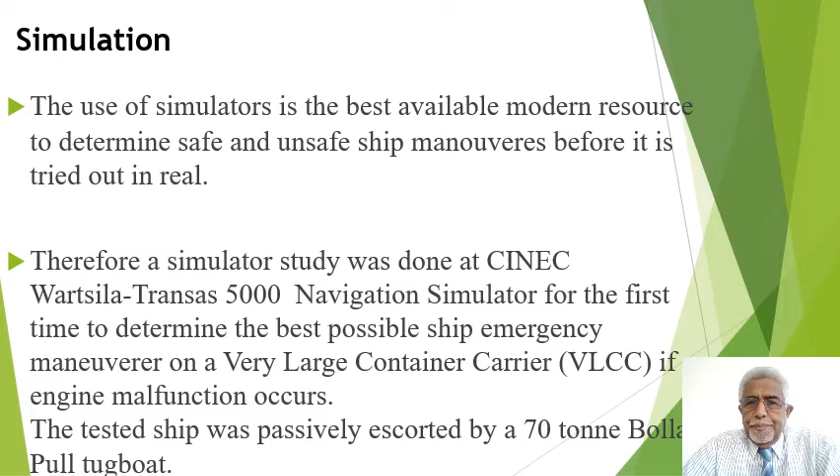The research aim. The aim of the study is to identify how such incidents, mainly due to equipment malfunction, can be prevented with least damage to other property inside the harbor, including other ships and jetties. The simulator research study will identify the best preventive action to be taken in future by ship handlers, including harbor pilots and ship captains, using all available resources, or if further resources are needed, to be recommended to stop the ships safely in the harbor.

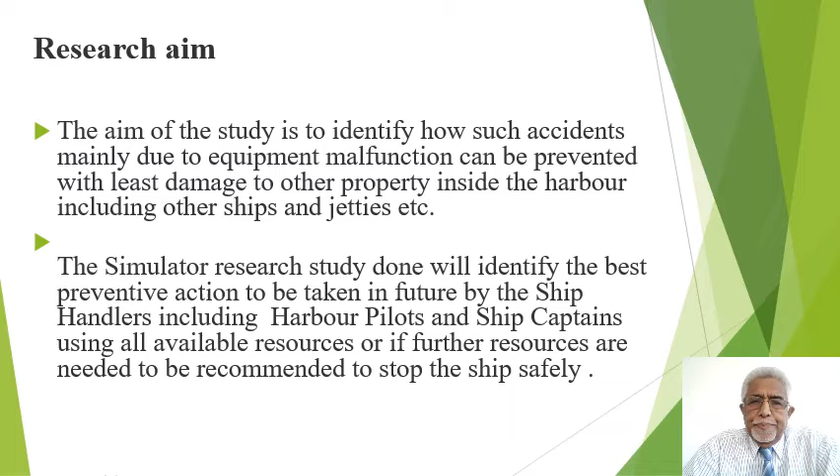This slide shows you the overview of Colombo harbor, with the ship entering the southwest breakwater. Here you see the northern entrance, and this is the southwest entrance. At the southwest entrance breakwater, you can see this ship entering, and that is where normally the engines are stopped and reversed to go astern, and the possible malfunctions do occur.

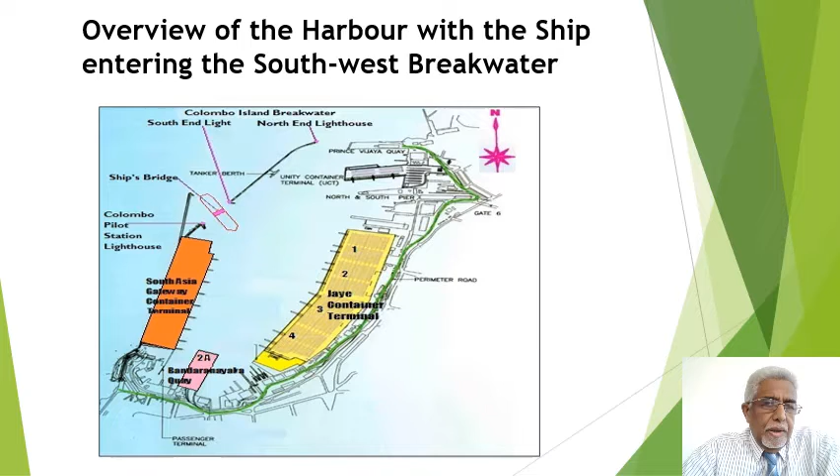This photograph shows the typical model of the ship being tested in the simulator. The length of the ship is 382 meters, the breadth 54.2 meters, and a draft of 13.0 meters, which is the depth of the ship. It has a carrying capacity of 13,100 containers. So she is a very large container carrier.

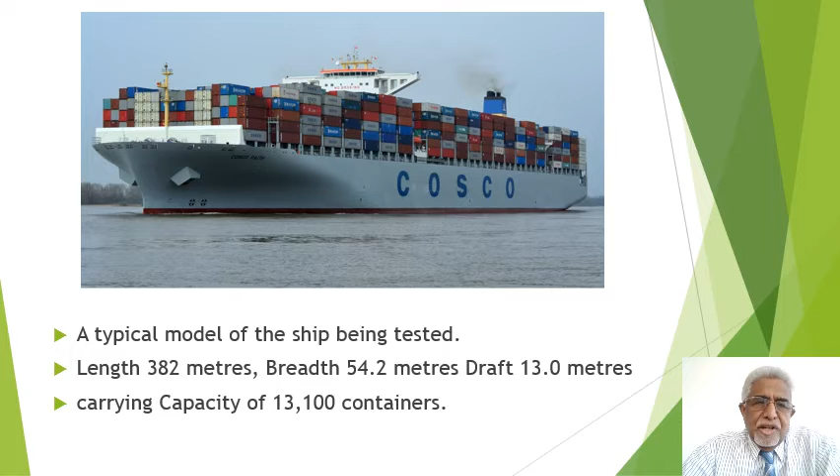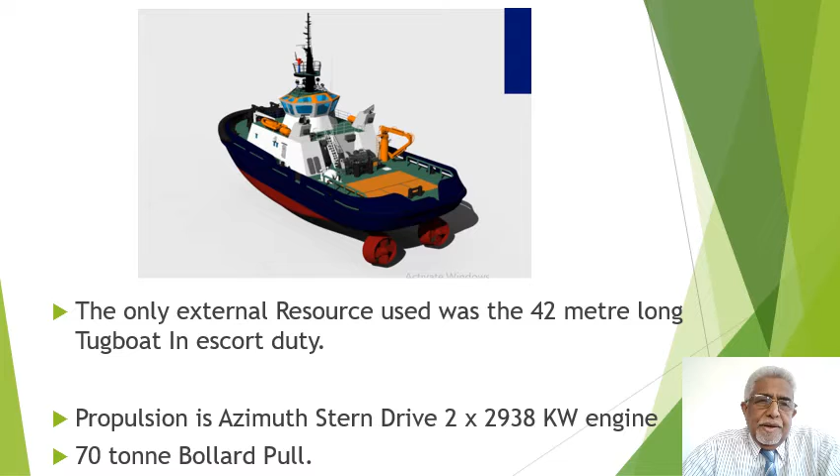The only external resource used was the 42-meter long tugboat on escort duty. She is made fast to the ship when the ship arrives inside the port. Propulsion of this tugboat is azimuth stern drive with two 2,938 kilowatt engines. The tugboat has a power of 70 tons bollard pull.

Methodology. The main methodology is done on 3 simulation trials, after which the data is compiled and compared. B. To identify findings with the safest maneuver with recommendations and suggestions.

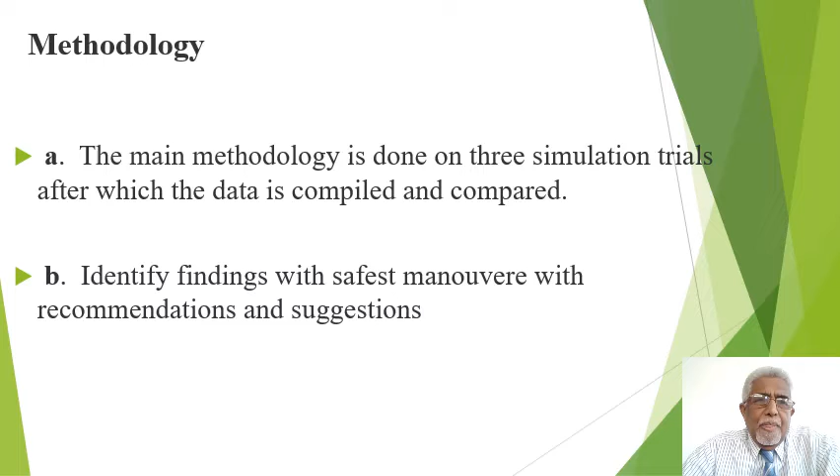Study test number 1. You can see the harbor entrance overview, and also the resources used: the escort tug and the ship's rudder to stop this ship with the engine malfunction which occurred at the harbor entrance. The position of the ship is in red here, and the tugboat is in black, and these dots at 1 minute intervals are recorded. The result was the vessel was brought to a stop in 3.2 ship lengths or 6.6 cables, and the ship was safely brought to a stop.

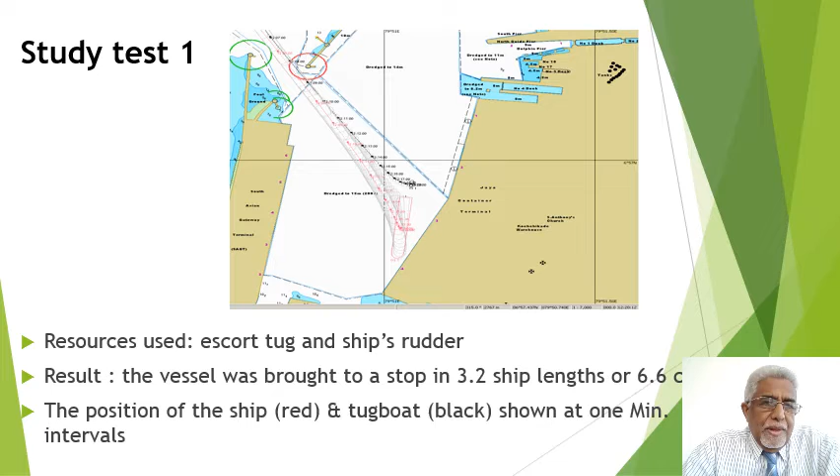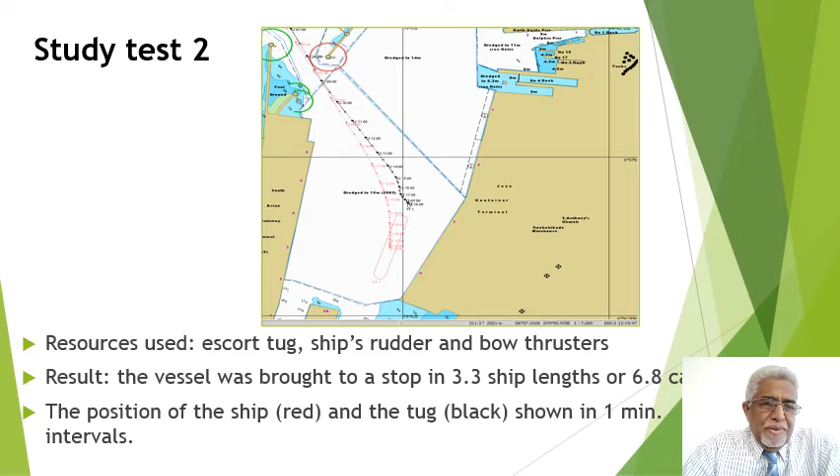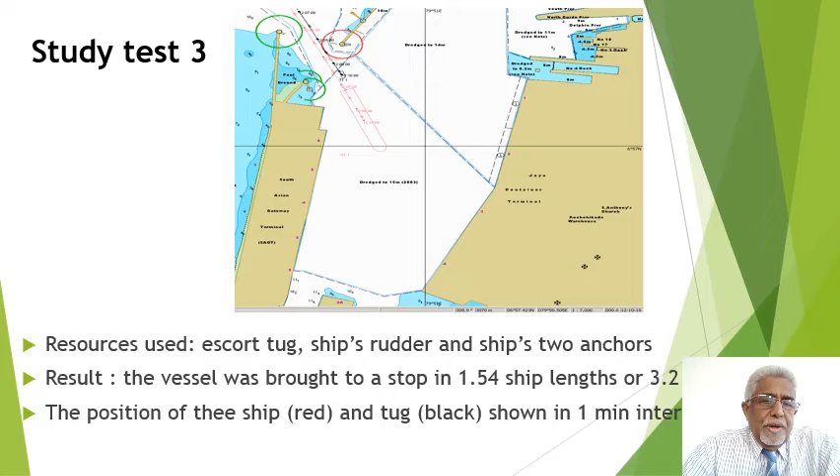So, in conclusion, considering the 3 studies, it was observed that the safest and the shortest way to stop the ship was by the use of the 2 anchors, ship's rudder and the escort tug. That is study number 3. The next best controlled stop was with the use of the ship's rudder, the bow thrusters, and the escort tug. That is in study test number 2.

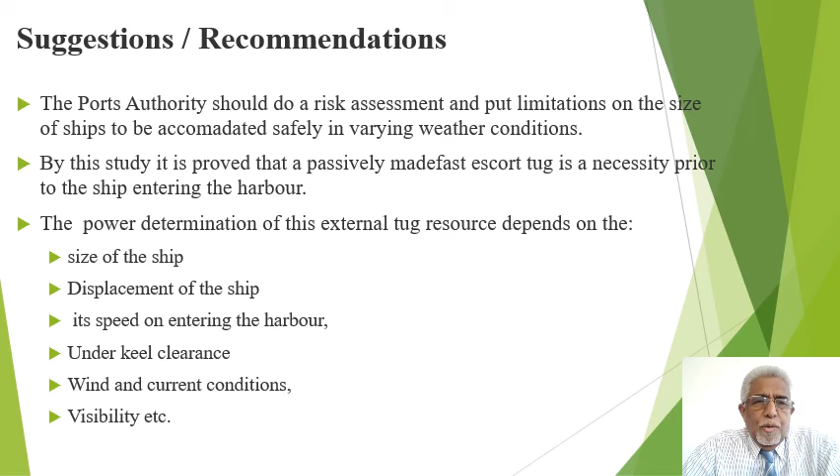So, from this, we give recommendations and suggestions. The port authority should do a risk assessment and put limitations on the size of ships to be accommodated safely in varying weather conditions. By this study, it is proved that a passively made fast escort tug is a necessity prior to the ship entering the harbor. The power determination of this external tug resource depends on the size of the ship, displacement of the ship, its speed on entering the harbor, the underkeel clearance, wind and current conditions, visibility, etc.

In acknowledgement, this research is part of the World Bank funded simulator-based research for competent human resources carried out by CINEC Campus Private Limited under the operation of the Ministry of Higher Education in Sri Lanka.